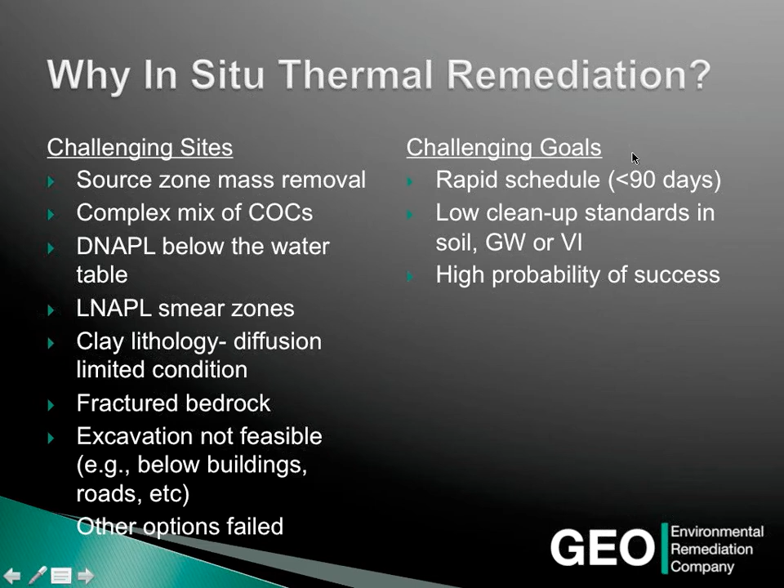Those are the kinds of challenges we like to see, and those are the projects we look for when working with our clients. From another practical standpoint, what are the remediation goals? Rapid schedules, generally 3 to 4 months - we've done projects in 1 to 2 months, depending on the property owner's goals. Low cleanup levels and having a high probability of success are sometimes really important factors driving the decision on which approach to select.

Some of the technical aspects of why thermal would be appropriate: what are the benefits of heat? Vapor pressure will increase by orders of magnitude as temperature increases. Viscosity decreases for high boiling point compounds. Desorption will increase, and looking at the diagram, as you add heat to a system, regardless of how and what form the contamination is present in the subsurface - and in most cases, if there's been some release with residual NAPL - you have all phases occurring and present at the site.

So there's an equilibrium established, and that equilibrium differs in terms of the concentrations or mass in any one phase, depending on whether you're in the source area or down gradient in the dissolved phase plume. As you add heat, desorption occurs from the soil into soil gas, or if it's in groundwater, it desorbs into dissolved phase in the pore space, and from there it boils off and volatilizes into gas. So whether you're heating NAPL to volatilize in the vadose zone, or desorbing it from soil into vapor, it ends up in gas.

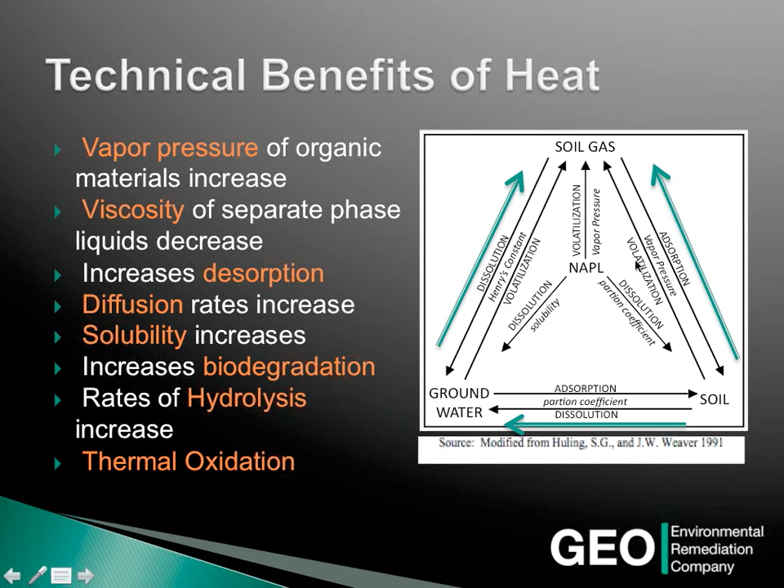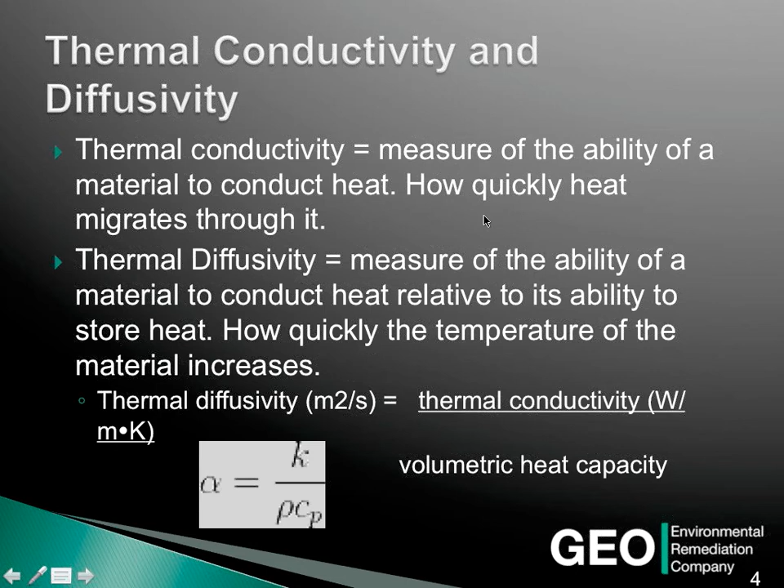So what are some of the other technical aspects? Well, thermal conductivity and diffusivity are important parameters to consider in thermal. Thermal conductivity is basically how quickly heat migrates through it, and diffusivity is how quickly the temperature of the material increases. And there's an equation there for you.

If you look at what does that mean in real terms, how do I apply that equation or those parameters? Let's look at the thermal conductivity of different geology: clay, sand, gravel, fractured bedrock, and in this case, this is an example of granite. You can see that the thermal conductivity of these different materials doesn't change very much. It could be by an order of 4, a factor of 4 maybe, at the extremes. So the difference between them isn't that significant.

What that means is that as you go from clay to fractured bedrock, it's actually more conductive thermally, so heat will transfer pretty quickly. That's something that we model in all of our designs, and I'll show you some examples of some design models in just a second. But those are the kinds of things that really allow thermal conductive heating to be a very prominent option for a lot of remediation applications with a variety of different compounds of concern.

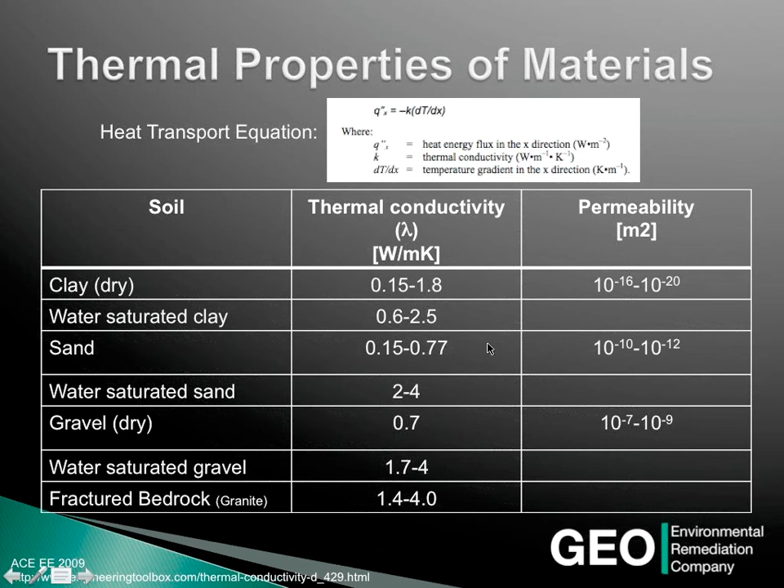So what about residual NAPL? Because really that's one of the big challenges for most in situ remedies that we've been using for a decade or a few decades in some of those cases, and all around the world.

The problem is that if you have those clay sites or fractured bedrock sites and you haven't really been able to identify exactly where the source area is or residual NAPL pods are, that's going to be a long-term remedial program, and it's going to require a lot of monitoring and maybe continual applications or ongoing remediation just for that asymptotic drop. I mean, things are usually going to be within a year or two in the asymptotic phase, and it's flatlined. And what do you do?

How do you get past that? That probably begs the question: was the conceptual site model really detailed enough?

But moving past that, and you look at this image that I have here, hopefully from those here in the room and those online, you can see little air bubbles in this image. You can see there's a scale of 1 millimeter. So this is pore space, and this is where bubbles of water are boiling and turning into vapor, and then they start moving out of the system.

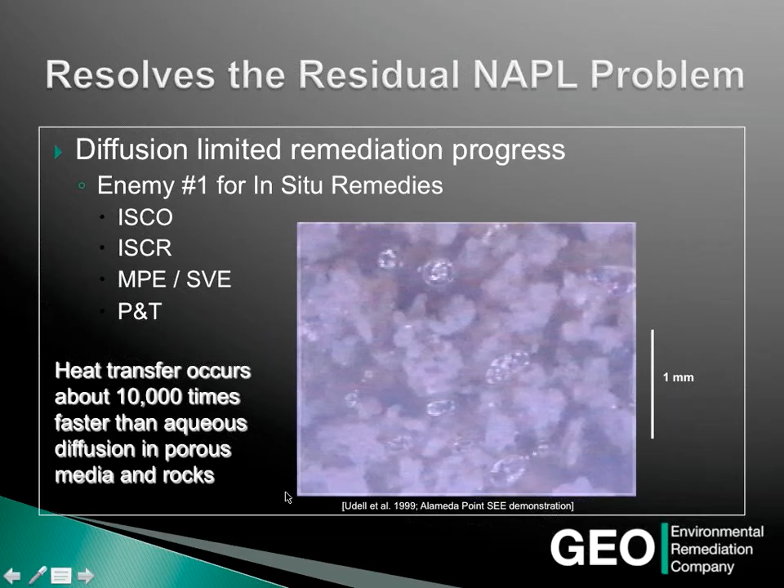Now heat transfer occurs at 10,000 times faster than aqueous diffusion in porous media rock, which means that basically it's going to be a very efficient way to remove mass. So what we did is created a little simulation, a cartoonish simulation, but hopefully the principles behind it are communicated effectively.

You have soil particles, soil mineral particles, you see micropore space, and what you see here, which look like vines or branches, those are preferential pathways in the soil matrix, and that generally always occurs. And there's always going to be some micropore space, and that would be macropore space.

But there's always micropore space where water isn't moving regularly, and in those cases, that's where a lot of residual NAPL might reside. So how do you get to it when most of the flushing and volume exchanges are occurring where the macropore space is connected, and that becomes a real challenge.

So as you start heating it up, the water starts to boil at 100 degrees Celsius, and so you can see some of the bubbles, vapor bubbles, boiling off. And as that occurs, it starts to remove and take some of the VOCs or contaminants of concern with it. And this is true even for high boiling point compounds that are very viscous, because once you get to 100 degrees Celsius, remember the viscosity has decreased, the solubility is increased, the vapor pressure is increased, and all of those benefits are in play to help make this contaminant more mobile and more easily extracted.

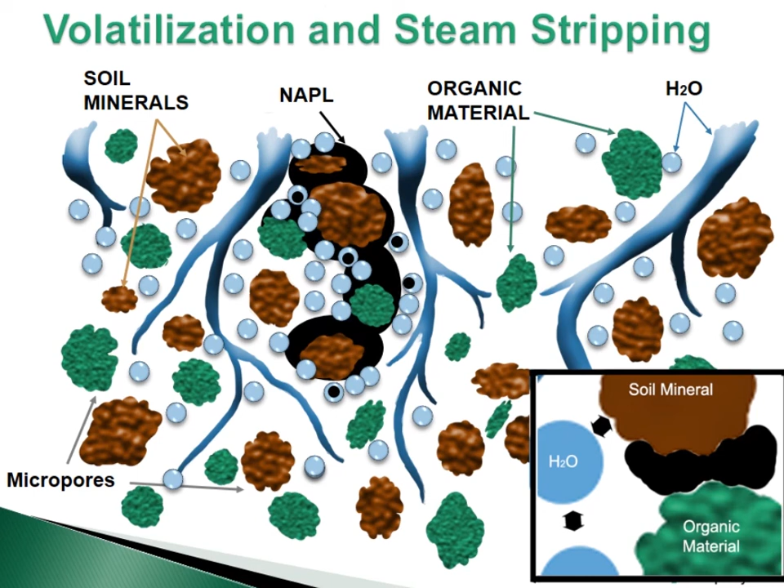So now that we understand what the benefits are and how thermal works, let's talk about gas thermal remediation. What is it really? Basically, it's as simple as we use fuel, propane, natural gas, diesel, or any other type of fuel that's available to ignite a burner, and that burner is a gas flame that is about 700 degrees Celsius.

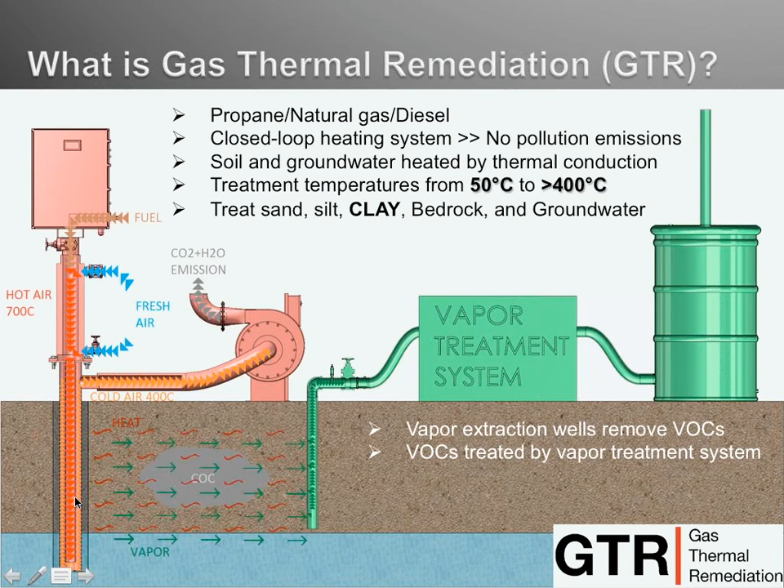And the most important thing, just to make sure everybody's 100% clear on, it's a closed loop heating system. So there's no pollution emissions, nothing's being injected. We're just making hot red steel to radiate heat in the subsurface.

So another question is, since in situ thermal has been around for a while, mostly with the use of electricity as the main power supply, how is gas different? Well, from a thermal remediation perspective, it's no different at all if you consider thermal conductive heating. So our form of energy use is just a choice, just like you have choices to drive gasoline cars or electric cars, and we have a lot of flexibility in the type of fuel.

This has actually been very helpful for us internationally because in a lot of sites, it's very difficult to get power drops in remote locations, and the subsidized fuels in every country is different. So what's cheap here is not what's cheapest in other countries. We've learned through experience working internationally and across North America that flexibility is an important factor.

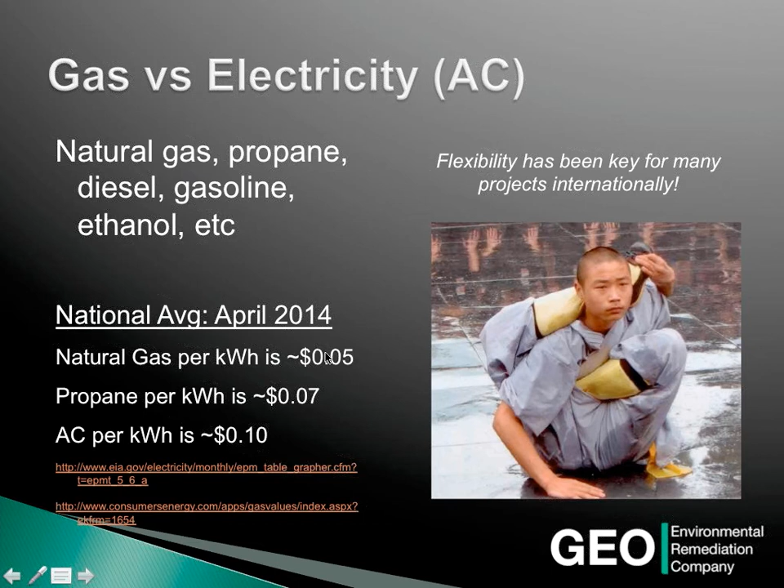It's probably a little bit different now, and it's very different in every country. So something to consider in your own region and your own site is what the actual values are.

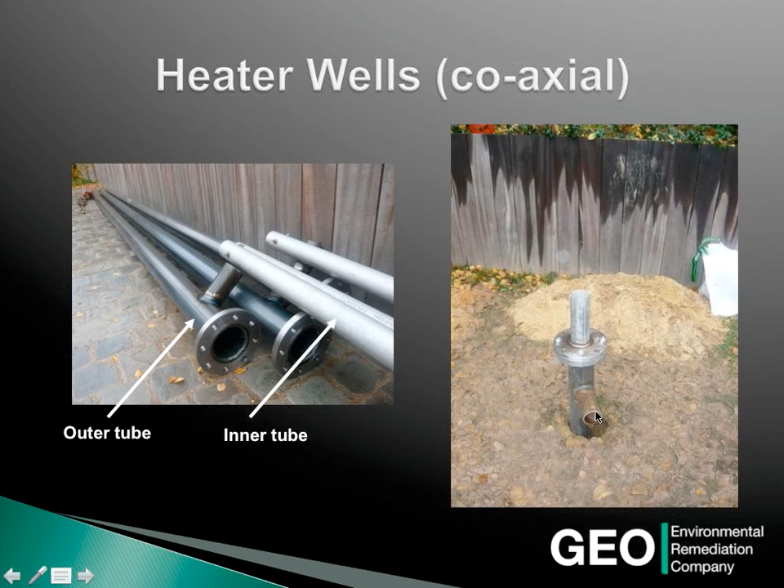Now I'm going to show you a couple of designs just so you can see what our design packages look like, and so you can get conceptually some ideas of what this configuration is.

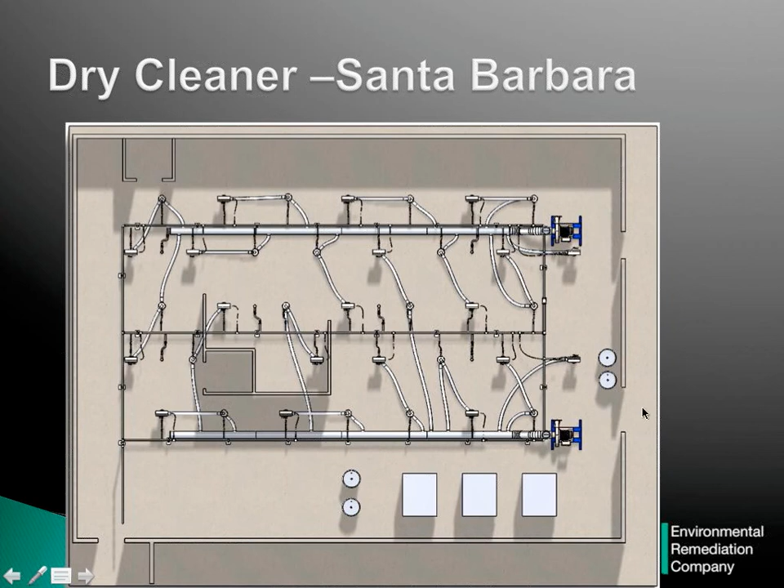This is a plan view for a dry cleaner in Santa Barbara, and you can see we're actually inside the building. We have to enter through the front door in order to get everything in. You can see the carbon drums. This is both the vapor extraction well network as well as the heater wells. Each of the heater wells is just like in the cartoon. There's a PLC control and the burner just beneath it that's connected to the steel casing.

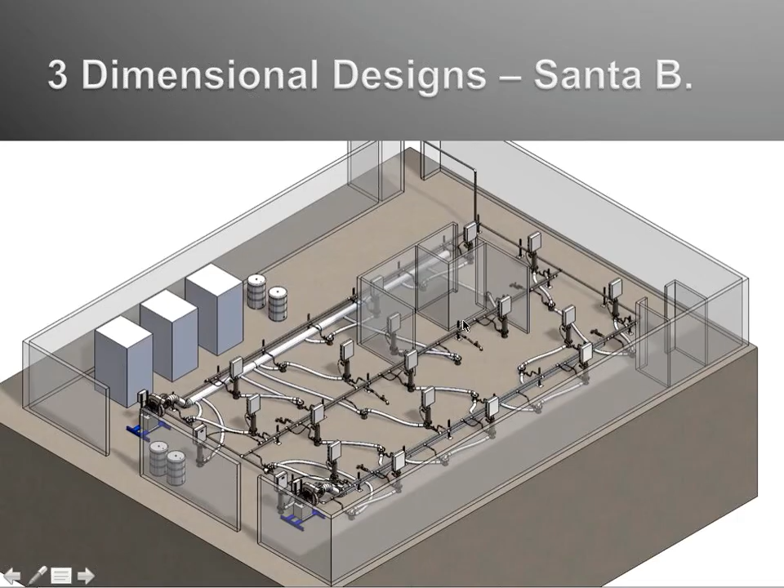And so working in small locations adjacent to active businesses is not a problem. There's a lot of health and safety controls that go in that are part of the design of the system and the management.

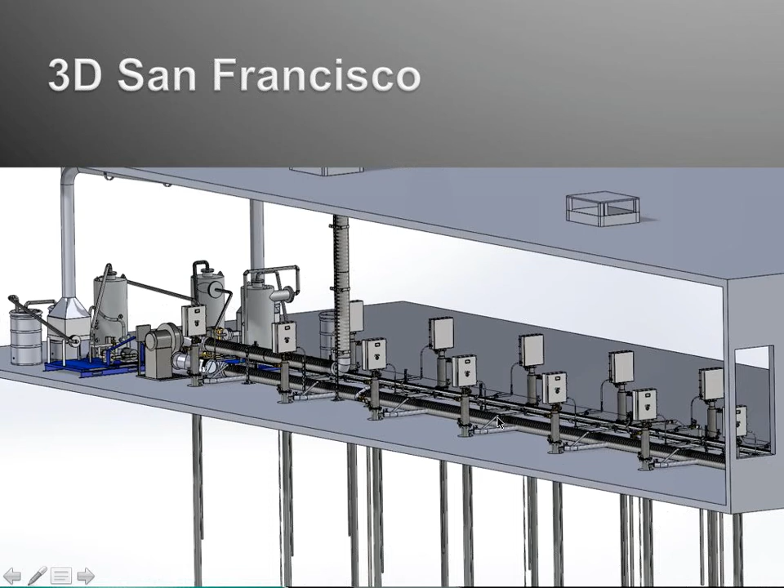There's thermocouples all around the entire treatment system and within the treatment system in order for us to monitor performance and evaluate when we're going to hit target temperature. That's important because we want to minimize the amount of energy we need to put into the system and make it the most cost-effective possible. So it's always a management process to make sure efficiency is always part of the program.

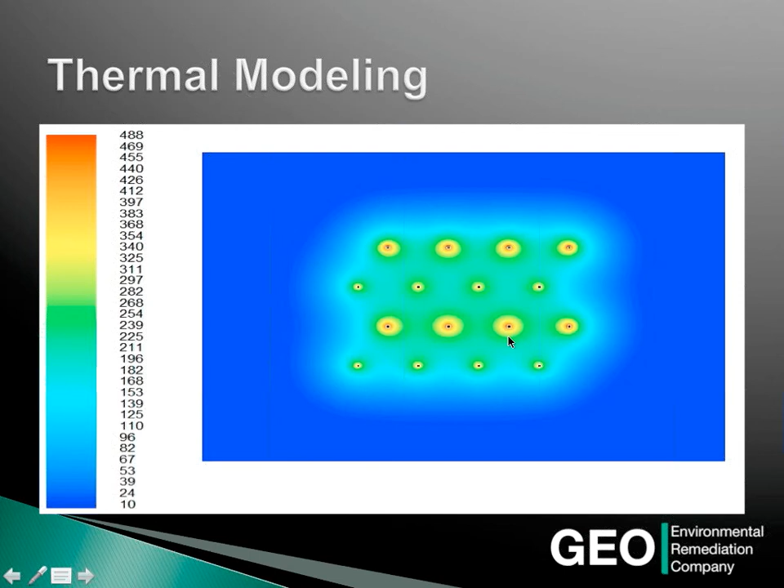So for certain applications, such as vadose zone applications, where we don't need to get to superheated temperatures, we will use the residual heat from the first heater well and pipe it right into the second one. That allows us to be more energy conservative and heat a larger area with the same amount of fuel, essentially doubling - well, not quite doubling, but pretty close.

That'll determine how many heater wells we're going to require. So generally speaking, the higher the target temperature, the closer spaced the heater wells are going to be, and therefore the more heater wells we're going to have. There's a balance between efficiency, performance, and cost, all in the design. We actually have an iterative design process that evaluates what the optimal design would be.

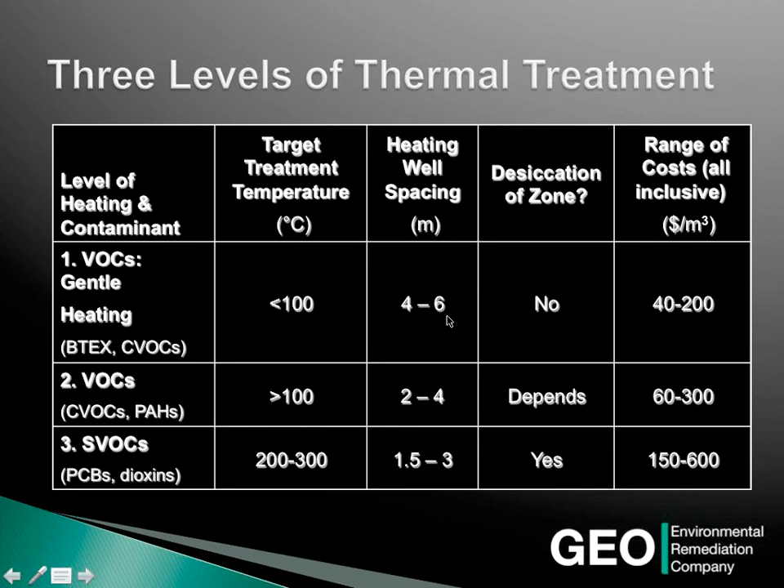So gas thermal remediation is applicable in both small and large projects. I'm about to show you 2 case studies now in greater detail to reflect that. In short, basically we can do small projects very quickly. Generally speaking, we can mobilize within 30 days of contract.

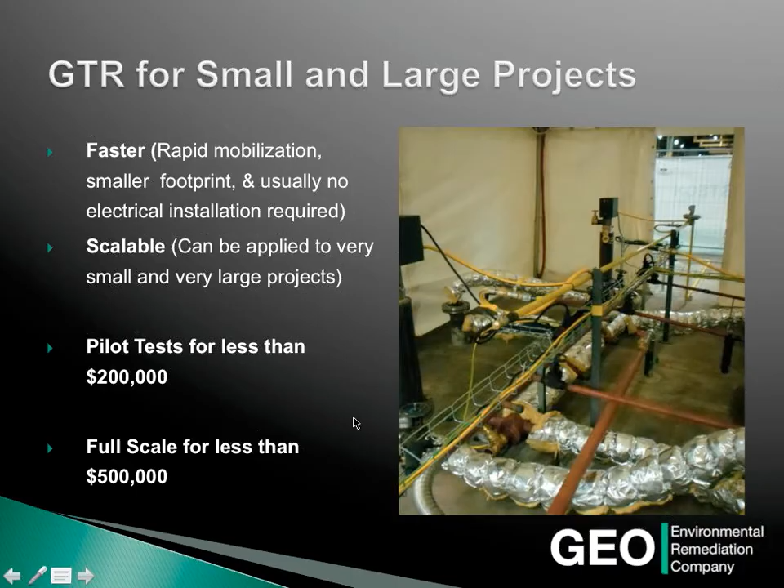It's scalable. We can do very small pilot tests at a very reasonable cost for proof of concept requirements. And some of the small projects tend to be at a pretty reasonable price, and that would generally be dry cleaners. So you can see this is a dry cleaner, different from the other 2 models and designs that I showed, and this is the entire vapor treatment system on the right-hand side.

And the heater wells are right here, and this is the PLC control box. There's a separate PLC control for every heater, and every heater is managed individually, all part of one system.

That gives us a lot of flexibility, because if there's a groundwater flow in a particular direction that is a little faster than predicted based on the client's conceptual site model, that means there's going to be more heat loss on the upgradient side. So we have flexibility with individual controls for each heater well to compensate for that heat loss and increase the energy flux in that area.

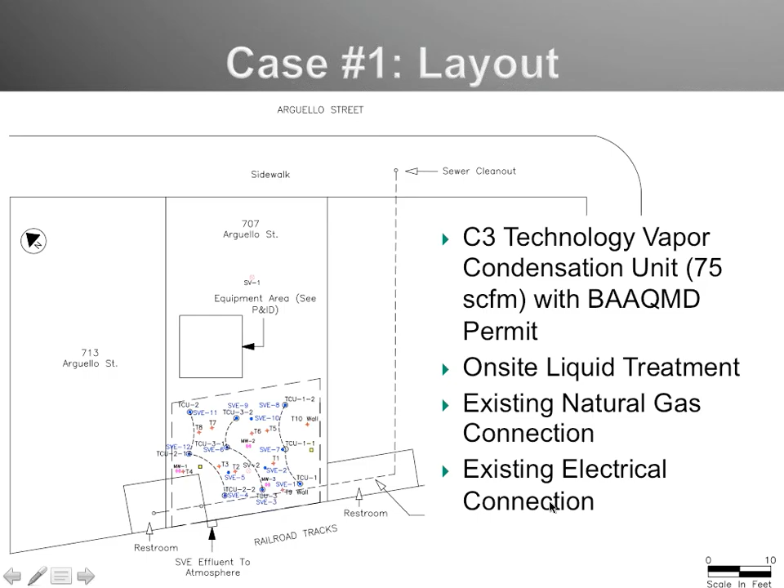So this is a site plan. You can see where the equipment was for the treatment area. We used our cryogenic condensation system, basically a refrigerated condensation system that condenses the VOCs from the vapor stream. We used existing natural gas and existing electrical connections, and there was on-site liquid treatment.

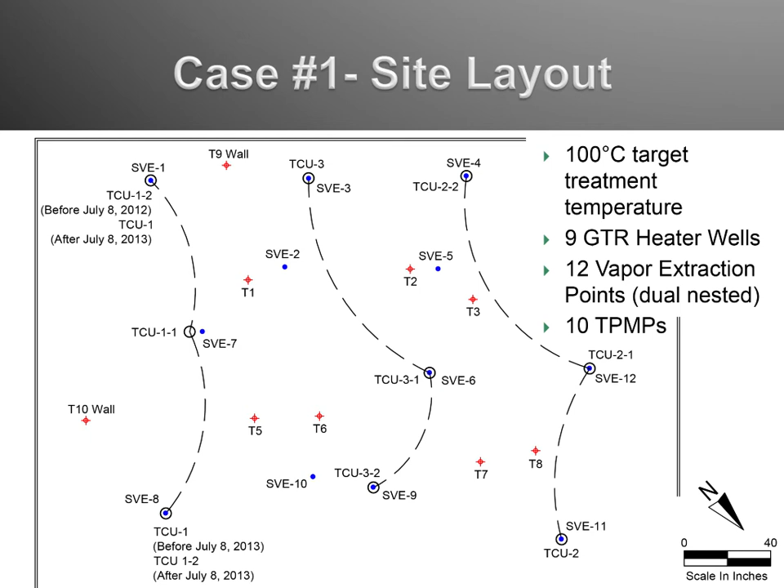So you can see a closer view. We have 9 gas thermal heater wells, 12 vapor extraction points, and 10 thermocouples and pressure points.

The end result was that we achieved 100 degrees Celsius temperature, which was the target, in 185 days. Approximately 3,000 pounds of PCE and its degradation byproducts were recovered as DNAPL with our refrigerated condensation system, so we can actually see in physical form how much NAPL was recovered.

Post-remediation vapor sampling results reveal decreasing concentrations, ultimately achieving low vapor intrusion risk criteria for closure. 825 pore volume exchanges are calculated to have occurred based on the condensate and removal rates, and almost 6,000 gallons of water was recovered.

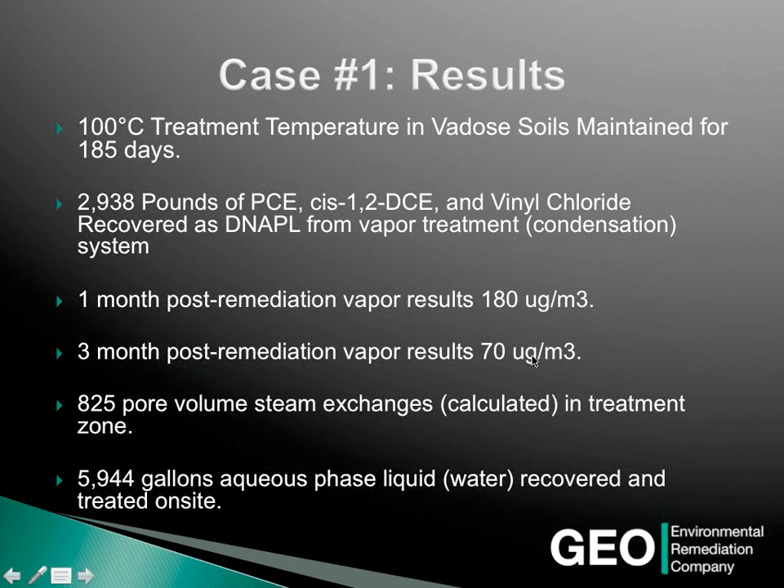So our conclusion from this site is that some sites have very strict limitations in terms of what you can get inside the building. In this case it was a 3-foot wide door, and everything had to go through that door — tearing down the building or going through construction permitting was not an option for the client. So sometimes that can add a little complexity.

High resolution site characterization is very key and could have probably been a little more precise here. There was a bit of the source area just outside the target treatment area that wasn't discovered, but during the treatment process it was determined there was more mass there, coming from a boundary not part of the design. So high resolution or additional site characterization can aid significantly in managing costs and expectations.

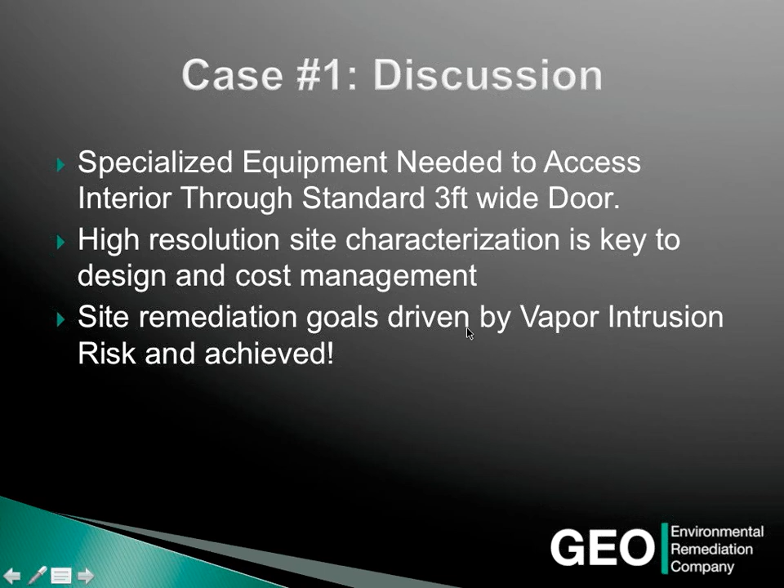And thermal can be used to meet vapor intrusion risk treatment criteria.

So the second case study is a former MGP site. There was benzo[a]pyrene and a whole bunch of other related MGP contaminants of concern, including naphthalene, TPH, gas, diesel, and motor oil.

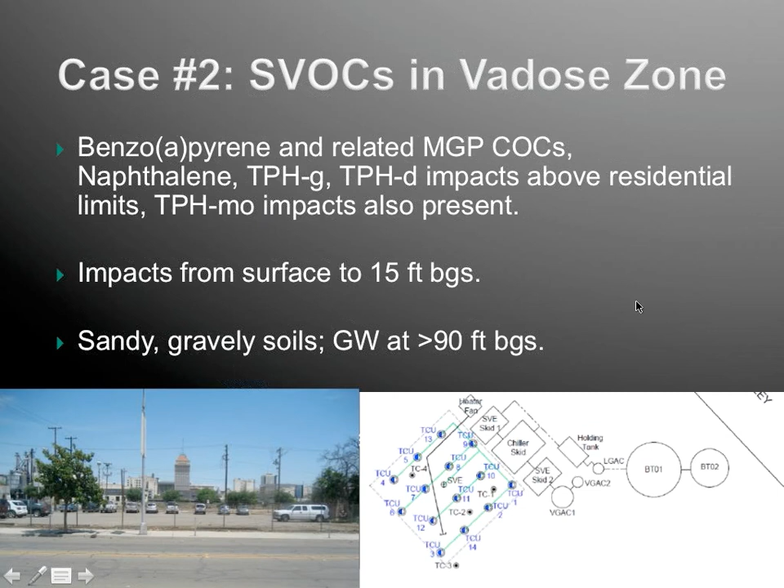Impacts were from surface to 15 feet below ground surface, mostly sandy, gravelly soils, and there was no groundwater influence. It was pretty deep, so we weren't going that deep.

You can see from the picture here what the site looked like. Each of these heater wells was independent. There were no secondary heater wells at this site as there were at the dry cleaner site, because the target treatment temperature is much higher in order to get these high boiling point compounds out of the ground.

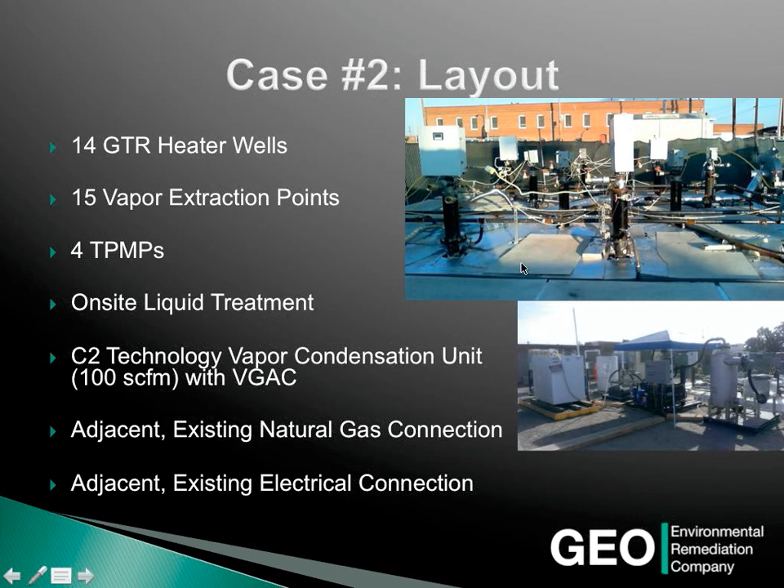There were 15 vapor extraction points, 4 thermocouples, on-site liquid treatment, a vapor condensation system with granular activated carbon vapor treatment. We used existing natural gas and existing electrical connections, so no outside utility upgrades were required for this project, actually for either project I'm presenting on.

This is the site plan view, so you can see the configuration of the heater wells, and you can see the spacing in feet — roughly about 6-foot spacing on the heater wells.

And you can see the train of vapor treatment. There was a heater fan right here, which is pulling the combustion air out of the heater wells. Then you have a soil vapor extraction skid, chiller skid, and a second SVE skid before going to the carbon vessels. And this is the water treatment system here.

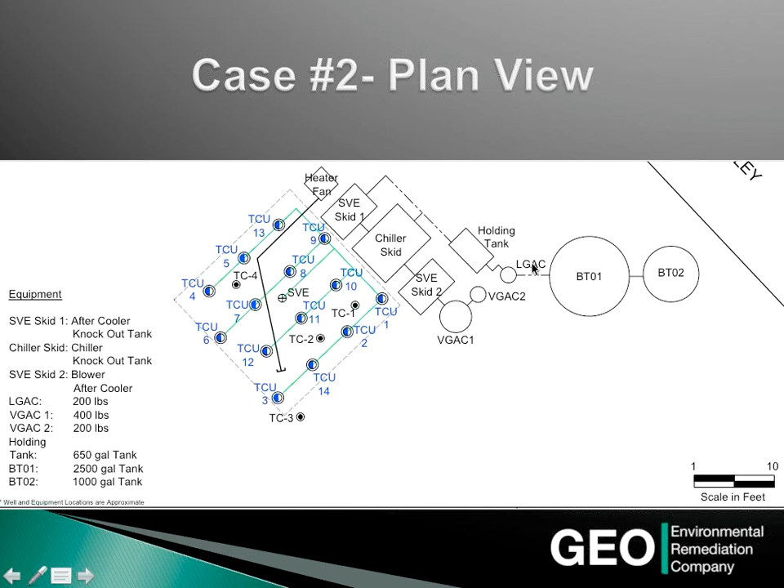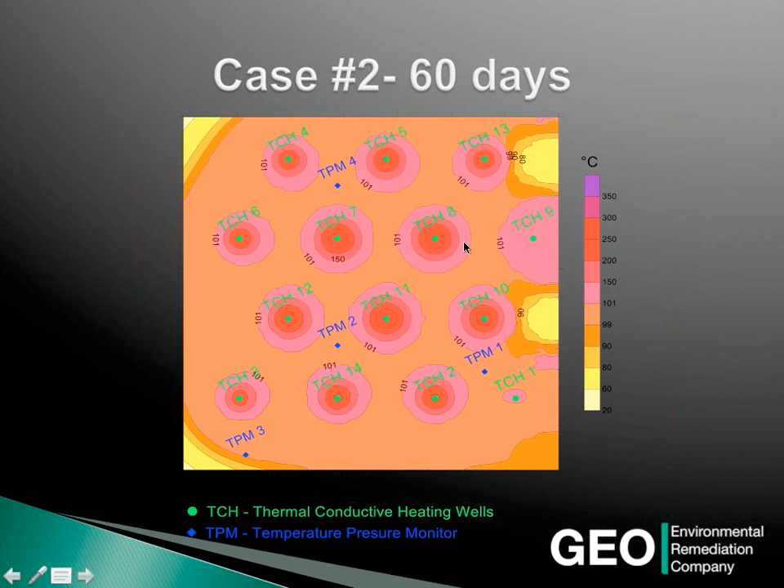So after 60 days, you can see that the ambient temperature between heater wells was roughly in the 90 to 100 degrees Celsius range, and right around the heater wells it was far in excess of 100, around 300 degrees Celsius. And after 120 days, the ambient temperature was above 350 degrees.

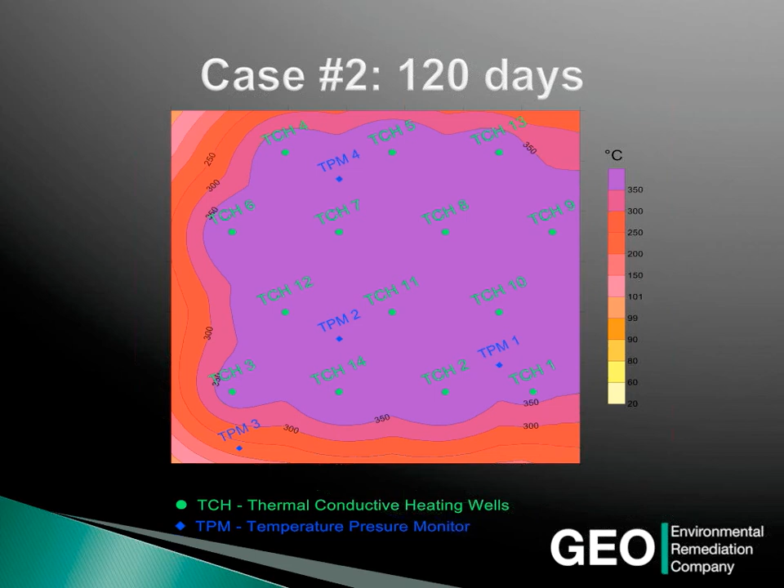Once we achieve target temperature at any site, we have to maintain it for a residence time, a certain period, to allow those contaminants to get out of the soil and into the extraction wells so we can remove them. In some cases we use multi-phase extraction. If it's a high boiling point viscous material with a lot of non-volatile fraction, we can flush hot water to get some of the NAPL out, combining approaches. We've done that at different sites. But in all cases, once we reach target temperature, we have to maintain it for a certain period, depending on the contaminants.

We typically always over-drill and heat below the target depth. So if the target depth was 15 feet for the bottom, we will typically go 3 to 5 feet below that, because there's a lot of heat loss at the bottom that we need to manage. If you don't do that, your bottom sample isn't really going to achieve the desirable goals. That's true for all thermal projects.

There is a lot of heat loss at the bottom, and basically all the boundaries — bottom, sides, and top. At all sites, they always have a concrete cap, which I'll show in a different picture. The concrete cap helps provide insulation to minimize heat loss. So we put insulation on the surface, then a concrete cap on top. That allows us to walk on top safely, eliminates safety hazards in the work area, and also prevents a lot of heat loss, making the system more efficient.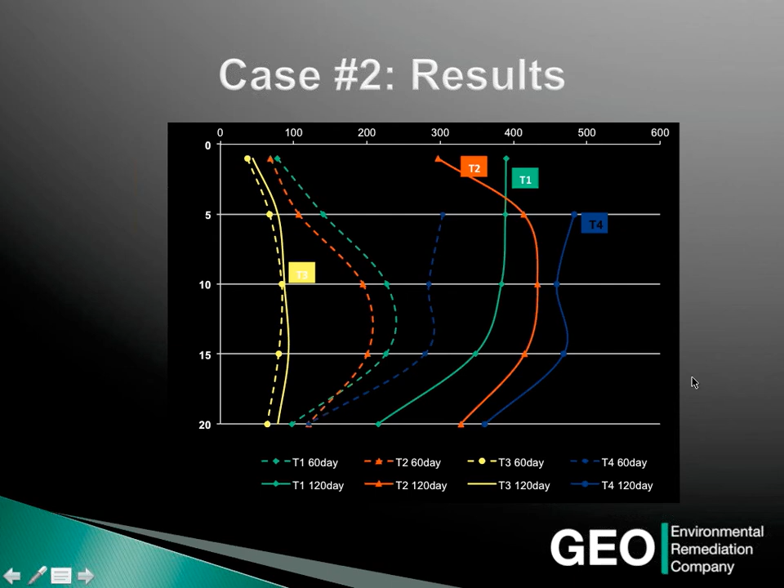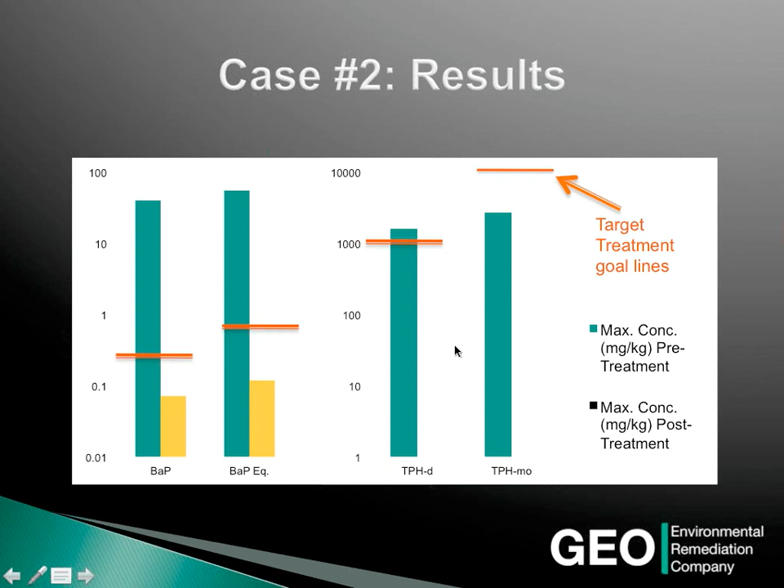BAP was reduced significantly to below the target treatment goals. BAP is benzo(a)pyrene, which was one of the primary contaminants. So we looked at how much mass was there and did a mass calculation.

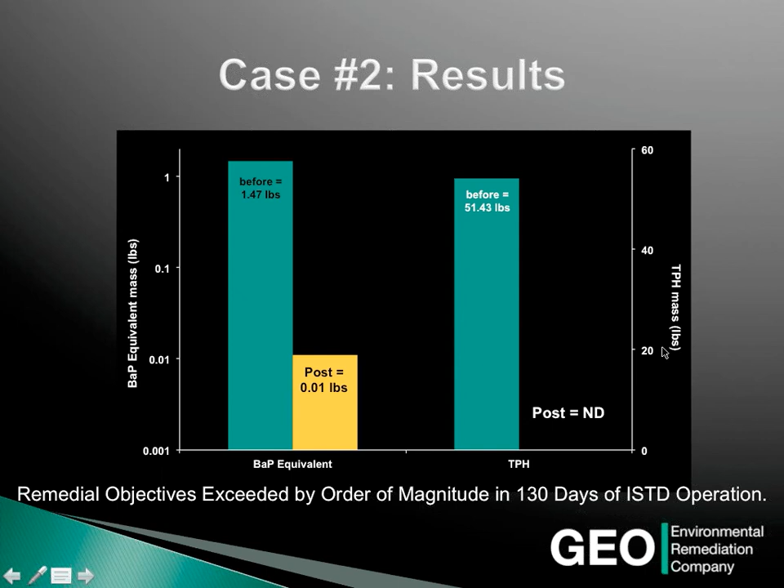Of course, mass calculations are always subject to error based on the quality and amount of information available. But the calculation was that there was 1.47 pounds of benzo(a)pyrene pre-treatment, and post-treatment, using the same criteria and approach, it was 0.01 pounds. There was no TPH identified post-treatment, removing at least 51.43 pounds in 130 days.

So some lessons learned from this project: there was more water content in the soil than expected. We really didn't expect a lot of water since it was the vadose zone and groundwater was so deep. However, that does impact the heating schedule because you have to boil off all the water. So sometimes optimistic assumptions in the conceptual site model can lead to a slightly longer duration or a slight increase in expenses, and that's something to consider.

Electrical interruption caused a shutdown — a car accident where somebody hit a power pole. Although we don't require a lot of electricity, we do need PLCs and computers operating to manage everything, so when that shuts down and the SVE system shuts down, that can cause a delay. Having a backup generator, or at least something on standby, is probably a good idea.

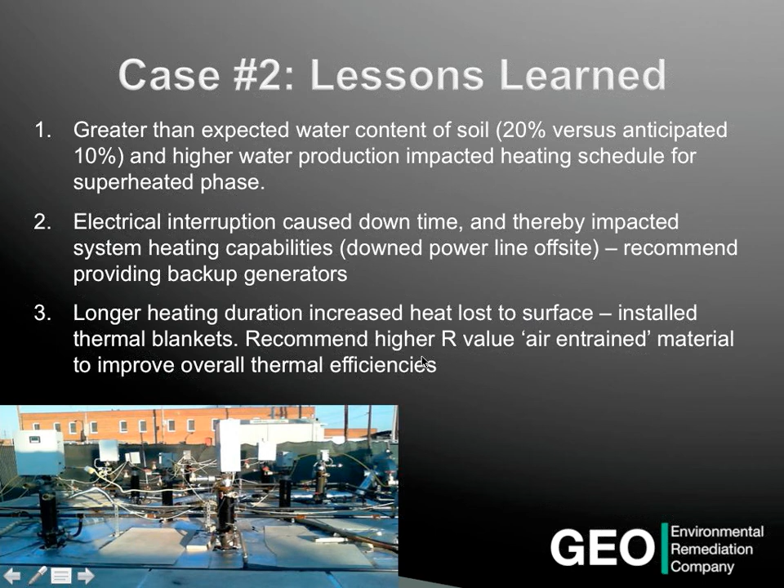This talks about heat loss at the surface — thermal blankets. As you can see, there is some insulation placed on top. For these really high temperature projects, in excess of 300 degrees Celsius, we use a high R-value insulation material below the concrete that helps manage those thermal efficiencies.

So in summary, the applicability for gas thermal remediation is quite broad, generally low temperature to high temperature. There isn't a lot of geological settings that we can't get to, although we currently have a limitation of about 100 feet in our thermal designs. We can mobilize rather quickly since our equipment's small, and most of the materials we use, the vast majority, are common industrial materials and equipment. Scalability and flexibility is one of our strong points. We do really small projects as well as very large ones, and guarantees are available both on a time and materials basis as well as treatment goals.

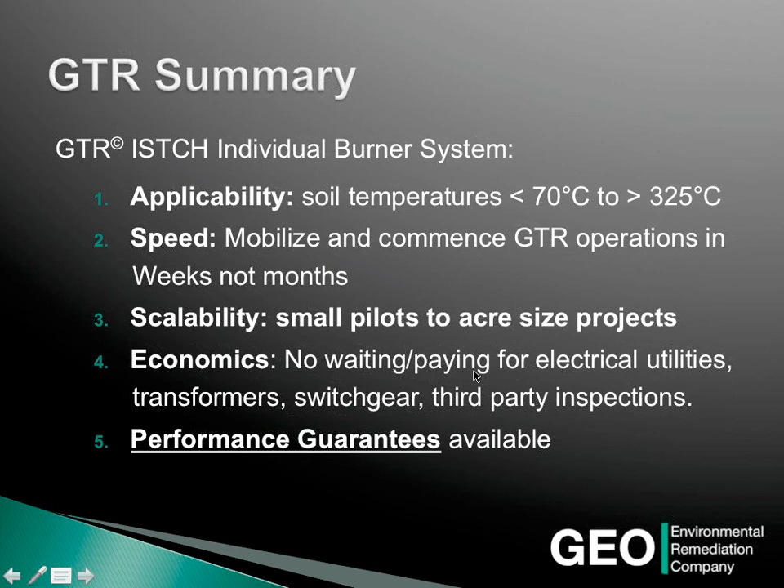So I'll take questions now. What's the largest area you've treated? The question was, what's the largest area that we've treated? I'm going to say the project we're currently working on is probably one of the largest, and I don't know the exact number.

I'll think about that and get back to you. I'm trying to pull the number out of my head. Less than an acre? Oh, less than an acre, I think. Yeah, it's definitely less than an acre. Although it's possible, any size is really possible. It's just a matter of how much gas supply and energy is going to be available there, and what's the need, what's the requirement.

You can have a lot of people checking equipment, and the burners will operate in sequence or simultaneously. For really large designs that we've done but haven't started yet, we try to manage the site over a period of time, also for capital reasons. If it's a really large site, tends to be in the tens of millions of dollars, and you can phase it, and that reduces the stress on the local community power requirements and gas supply. So that's really the main consideration. Although from a physical standpoint, or implementability, we can do any size, but there's always some constraints local to the site that requires more of a phased approach.